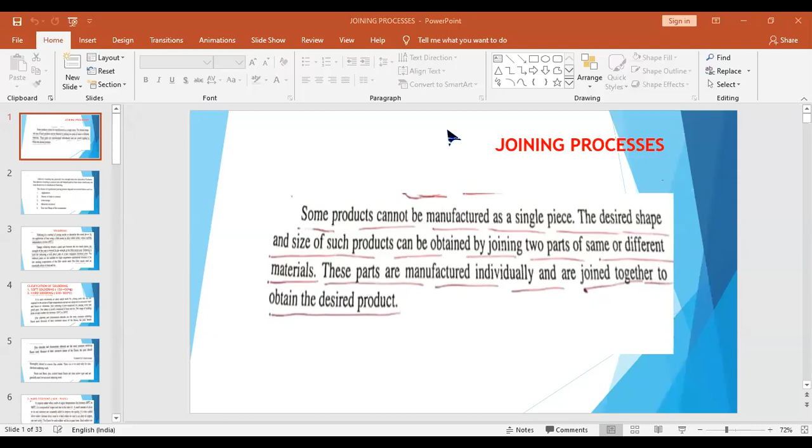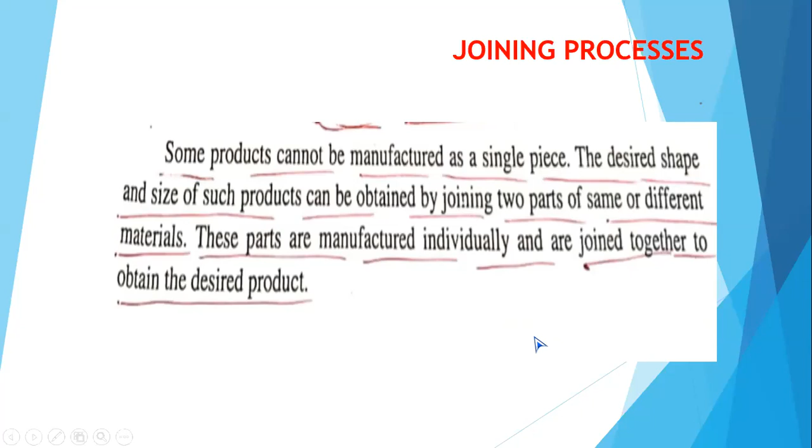The joining process is defined as joining of two or more components, or joining of metal or non-metal, by the application of heat or non-application of heat, and also application of pressure or without pressure. Joining two or more components is called the joining process.

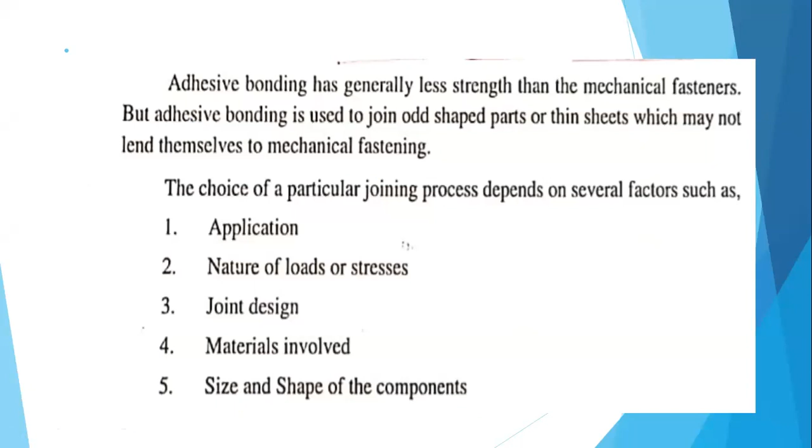The factors for the joining process are: where you use the joint, what stresses or load are acting on it, the joint design such as simple lap joint or T joint, the metals involved (metal to metal or metal to non-metal), the material involved, and the size and shape of the component. Whether it is a small component, big component, or intricate shaped component, the shape and size are also very important for the joining process.

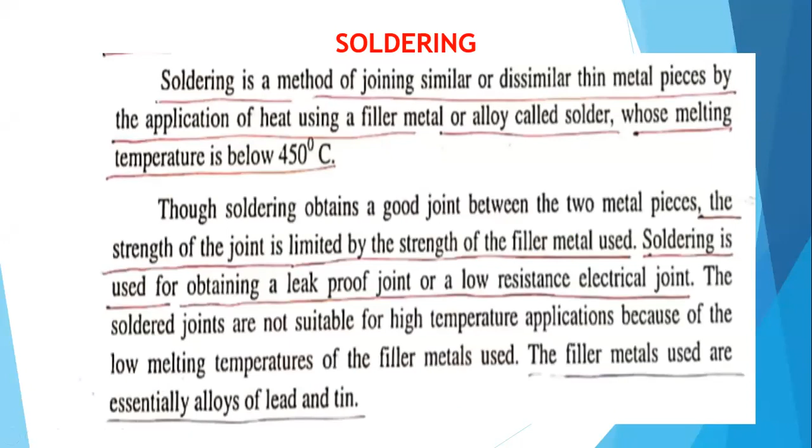Next, come to the point. The joining process is classified into three: soldering, brazing, and welding process. Soldering is classified into soft soldering and hard soldering. Soft soldering is carried out at a temperature range of 150 to 450 degrees centigrade, and hard soldering is carried out at 600 to 900 degrees centigrade.

Soft soldering is very important. Nowadays we are using a lot of electronic gadgets or instruments, for example TV, mobiles, anything. Consider anything in your house, washing machine, oven, or any instrument - there you have the electronic circuit. There you require the joining process, that is the soft soldering process.

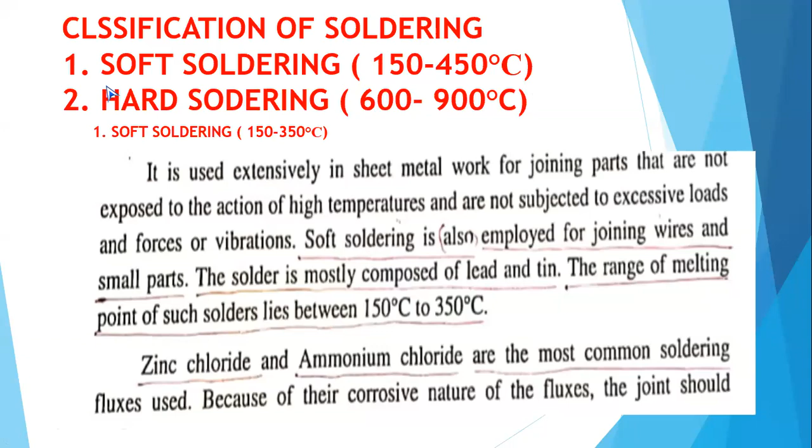Next, come to the point, hard soldering. Hard soldering is used in heat exchangers, air conditioners, refrigerators, radiators of cars or big engines. This process is carried out at 600 to 900 degrees centigrade. Instead of using soldering material (the filler metal), here they use the spelter. The spelter is the filler metal, made of alloy of copper, alloy of zinc, or alloy of nickel. This is very important for hard soldering.

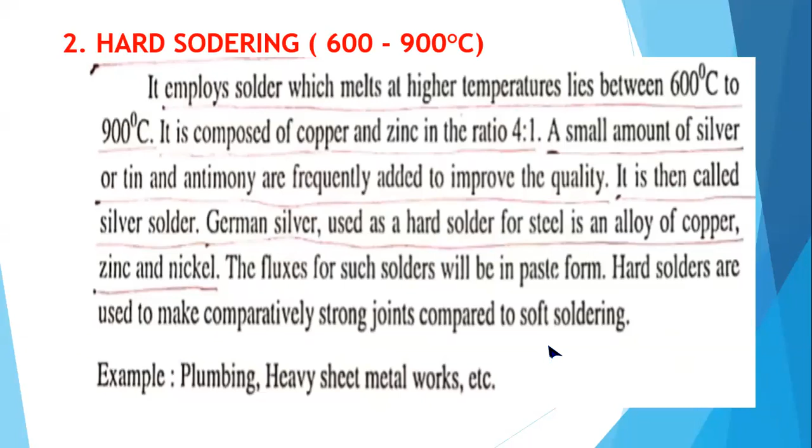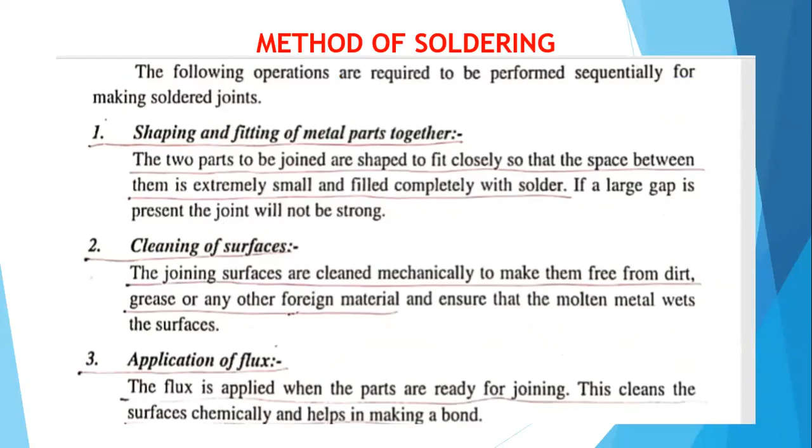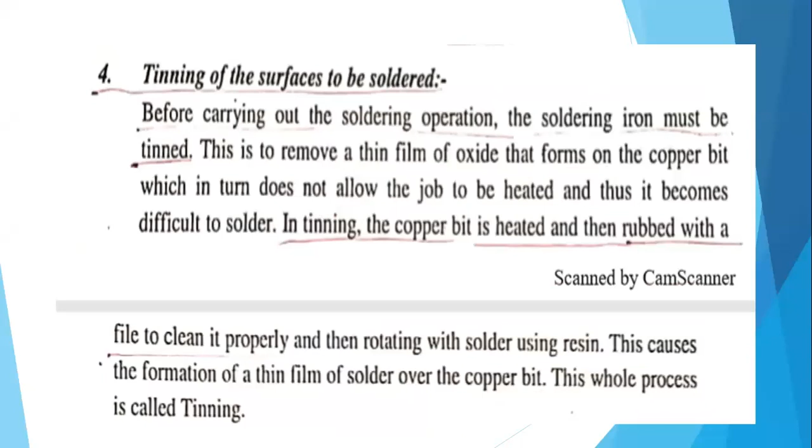Next, come to the point, the method of soldering. First you clean the ends of the components to be joined using a blade or file, and apply the flux on the joint. Then use the soldering gun, heat it, and whichever residue solder is present on the tip of the soldering gun can be removed using a blade or file. This is called the tinning operation. Then apply the solder in the joint and heat it so that the two joints are made using the soldering operation.

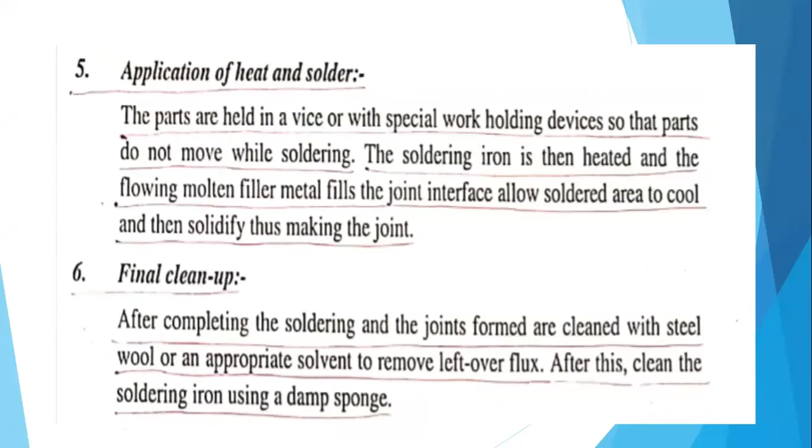Next, come to the point, the brazing operation. Brazing is used in chemical industries, air conditioners, refrigerators, heat exchangers, and many other applications. This process is carried out at 500 to 900 degrees centigrade, and is the most comfortable, economical method of joining non-ferrous metals. Remember, non-ferrous means copper, aluminium, brass, magnesium - these metals can be easily joined using the brazing process.

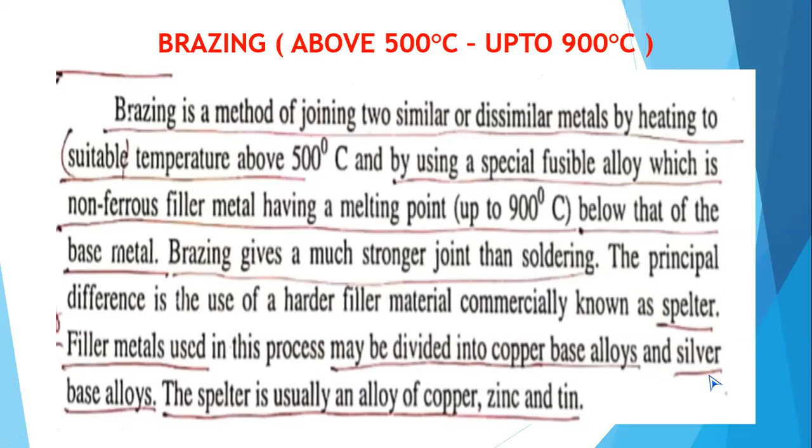Here, the process is carried out between 500 to 900 degrees centigrade, and the joint is made according to the application. In this process, the filler metal or filling metal is called spelter, which is made of alloy of copper, or alloy of silver, or copper, zinc, and tin.

Next, come to the point, the method of brazing. First, clean the surfaces to be joined using file, blade, and alcohol or kerosene, so that any dust, dirt, oxide, and grease present in the joint may be removed. The parts to be joined are clamped in the vise, or using a suitable fixture, to keep the joint in an intact position. Then use borax or boric acid - the same one used for playing carom - as the flux in the brazing process.

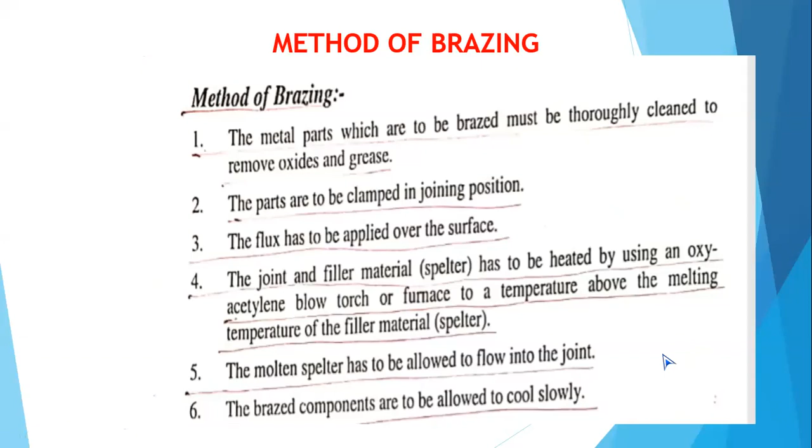Then heat the spelter until it becomes liquid and fill the gap between the two components to be joined using the brazing process, filling the joint with the liquid spelter. The spelter flows into the joint and completely fills it. Allow the spelter to dry in open air for 10 or 15 minutes. The spelter makes a strong joint between the components. Then the joint is ready for use, and allow the joint to cool in the open air.

Next, the difference between soldering process and brazing process. You have 10 differences for the examination; write a minimum of 8 differences.

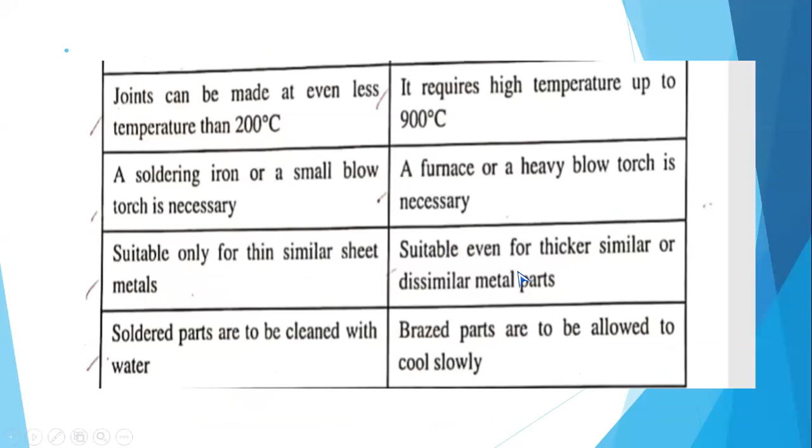Next, come to the point, very important - all of you mark this as very important. Without this question, there is no question paper at all. Later in this class I will give you the question. First, you should know the types of welding process.

That is pressure welding - in bracket you have plastic, meaning melt the ends of the components and join them. In this classification you have four: forge welding, resistance welding, solid state welding, and chemical welding. In bracket you have thermite welding. All of you have seen the railway track.

How do you join the railway track? Many competitive exams have a question on this welding process. This is the chemical welding process. Here they use chemicals, gunpowder, sulfur, and from that they melt the ends of the railway track and make the join. That is chemical welding.

This is also called thermite welding. Remember, thermite welding. Next, come to the point, fusion welding. The name itself indicates fusion welding.

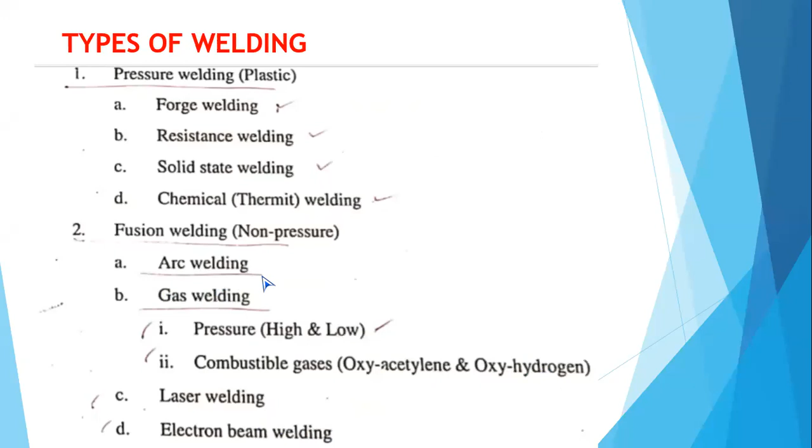Next, come to the first, autogeneous welding. The name 'genius' means joining of ferrous to ferrous or joining of non-ferrous to non-ferrous, the same type of metal. Joining of the same type of metal is called autogeneous welding.

Next, the last classification, heterogeneous welding. This is the joining of ferrous to non-ferrous or non-ferrous to ferrous. So heterogeneous, the name itself indicates heterogeneous. In this classification you have two: braze welding and friction welding.

Braze welding is usually used in chemical industries or joining of components in heat exchangers and other applications. Friction welding is also used in joining of ferrous and non-ferrous metals, but it has limited scope.

Next, come to the point, as we discussed about plastic welding. The plastic state means bringing the joint to the liquid state and making the joint. That is called plastic welding.

And fusion welding, by fuse, the name itself indicates fusion of the ends of the components to be welded. And that's the first one in fusion welding.

Arc welding. All of you have seen on the roadside or in the city, in all the workshops they are using electric arc welding process. This can be used for joining heavy metal more than 10 millimeters thick. The temperature produced in arc welding, all of you imagine, is 4000 degrees centigrade.

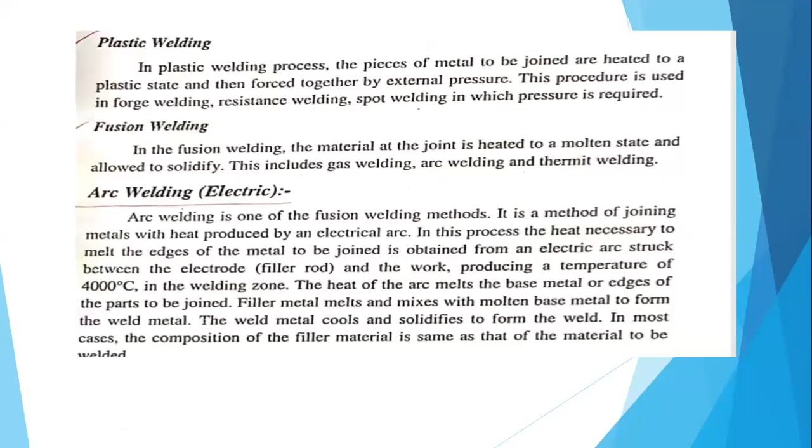The arc developed by the electrode in this process has a temperature of 4000 degrees centigrade, which is enough to melt the ends of the components, maybe stainless steel, maybe mild steel, maybe cast iron, or any heavy metal that can be joined using the electric arc welding process.

All of you have seen the electric transformer. Before explaining the components of the electric arc welding process, you must learn whether the current supplied to your house is single phase or three phase. Remember, the electric power supplied to your house is single phase, 230 volts, 5 amp current, and 50 hertz.

Suppose if you are consuming more than 5 kilowatts of power, then they provide three phase, 15 amp and 440 volts electric power to your house. This is the source of electric current, AC or DC.

Remember, this is very important, AC or DC. This is the transformer which converts AC current into DC. All of you remember, this is very important. The electric current AC is converted into DC.

And remember here, if it is three phase, the 440 volts is reduced to 40 volts in the transformer. 440 volts is stepped down to 40 volts, and the 30 amps current is increased, stepped up to 200 amps.

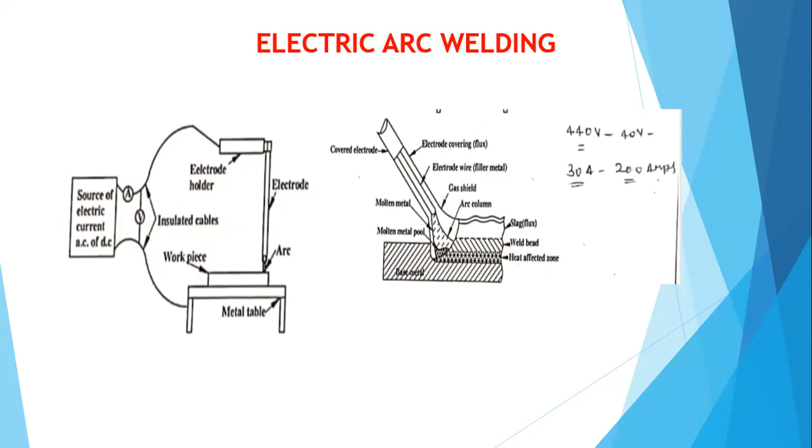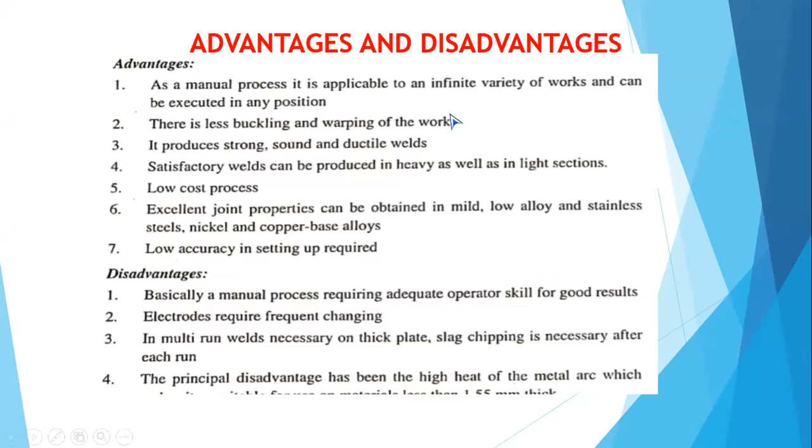This is the principle of operation of electric arc welding. You have advantages and disadvantages.

Next, the gas welding process. All of you have seen gas welding used outside or in the workshop, if the thickness is less than 10 millimeters. The metal may be ferrous or non-ferrous. Joining of non-ferrous metals like brass, copper, stainless steel, or ferrous to non-ferrous, steel to brass, or copper to brass, can be done by using the gas welding process.

Here you have two gas cylinders: one is the acetylene cylinder and the other is the oxygen cylinder. All of you have seen the oxygen cylinder in the hospital, which is a 1.75 meter long cylinder.

That's the oxygen cylinder. The same way you buy an LPG cylinder from an agency, the oxygen cylinder also you have to buy from the agency. The big cylinder is the acetylene cylinder, and the long slender cylinder is the oxygen cylinder, which is connected to the torch. The torch has two regulators, one for controlling oxygen and the other for controlling acetylene, along with a bent rod or pipe tube.

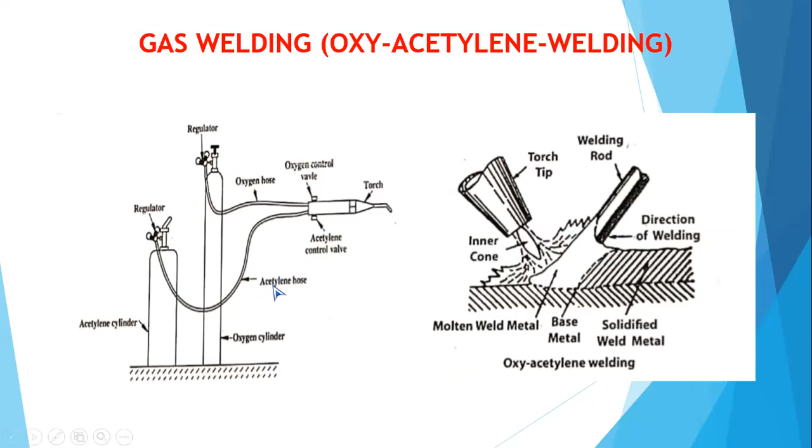Among the two welding processes, arc welding and gas welding, one is 100% guaranteed to appear in the examination. Mark this very, very important. In the examination, write both figures. If you write only one figure, your answer will not be complete — you have to write both figures.

Next, come to the point. As I told you, three types of flames are developed in a gas welding process: neutral flame, oxidizing flame, and carburizing flame. Write the question: explain briefly with a suitable diagram, the different types of oxyacetylene flames. Then come to the point.

First, the neutral flame: 50% oxygen, 50% acetylene is used in the neutral flame, and the temperature developed at the center cone of the flame is 3100 degrees centigrade. This is maximum enough to melt the joints of the components. This is suitable for joining ferrous as well as non-ferrous metals.

This is used in ship building. The entire ship is made of steel, and the thickness of the steel is more than 10 millimeters. Next, come to the point.

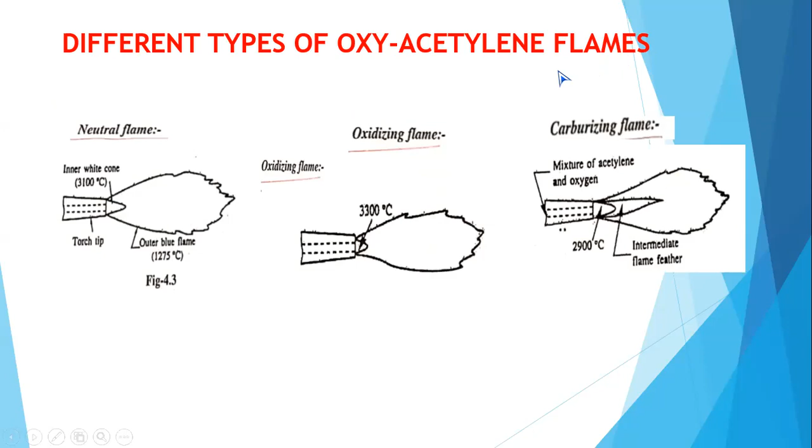Oxidizing flame as well as carburizing flame is used for both joining and cutting processes. Mark this very, very important — many question papers have a question on different types of oxyacetylene flames. This is very, very important.